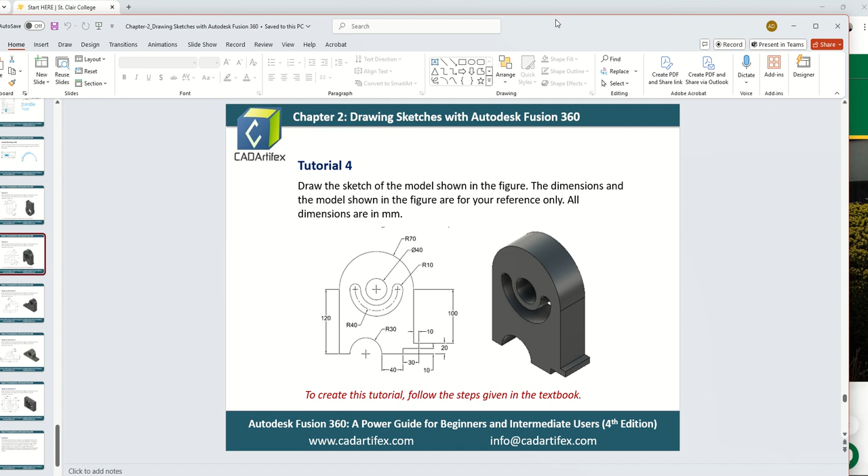Open up Fusion, I'll bring in my diagram here. Let's draw this one again from the front plane, and we're going to create a sketch. And let's start this one by...

drawing a rectangle. Let's draw a 120 by, this radius up here is 70, that diameter is 140. So let's draw a 120 by 140 rectangle.

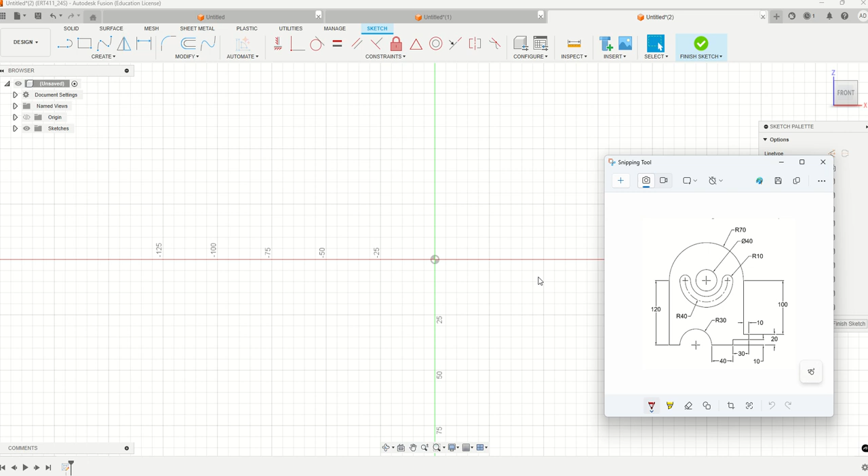Starting here, and we'll go 140 by 120. And that's going to be the basis of everything we're going to do.

And let's add to this now. So let's add a circle to the top of this, or I guess we can do it as a line, however we want to do it.

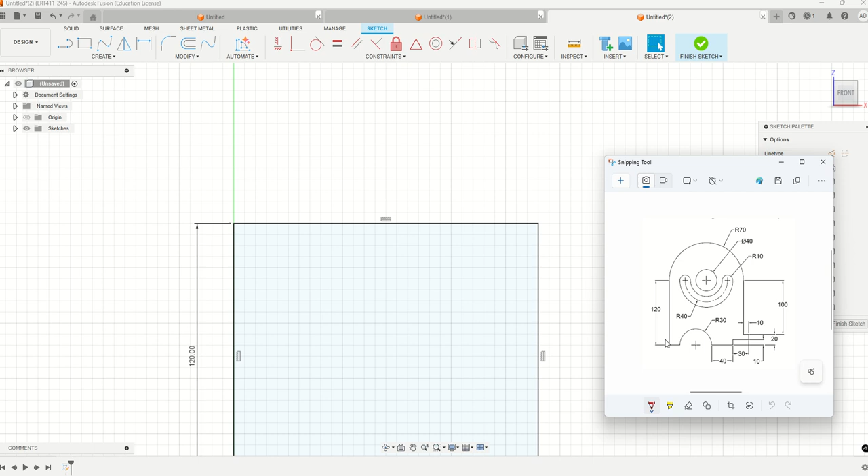But let's create it as a 3-point arc. Let's try it.

So here, here, and what's our midpoint here? Right there, and up. I think that's our 70 point there.

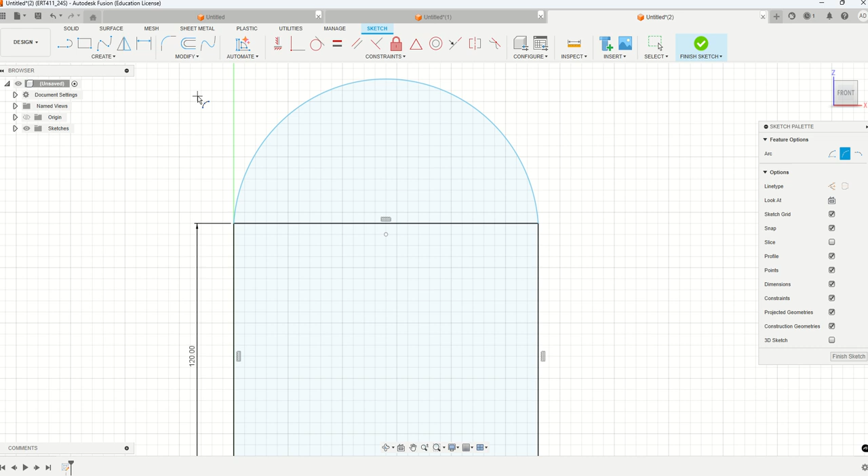Does that seem right? Not sure if that's right or not. No, that's not right. So let's go 70. All right, that's our radius of 70 there.

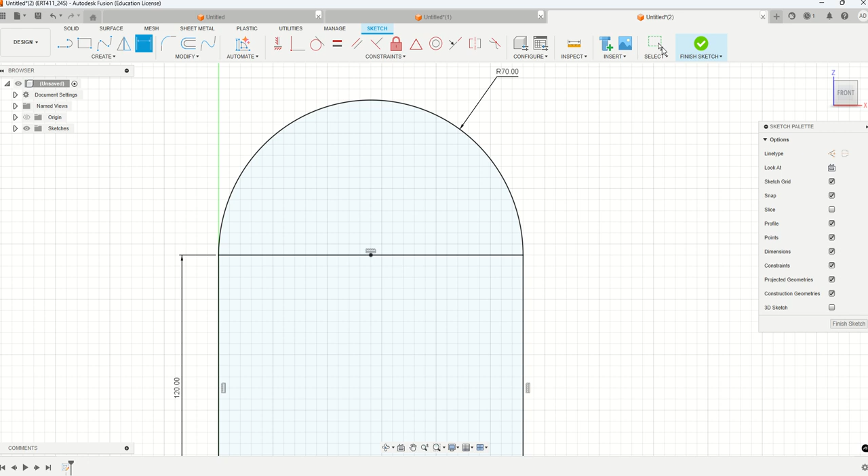Okay, so that's our arc. That's going to be on the top. And then we can just delete this line here afterwards. So that's that.

Now at this center point here, that locates that center point for us. Let's put a circle right there. Diameter of this has a diameter of 40.

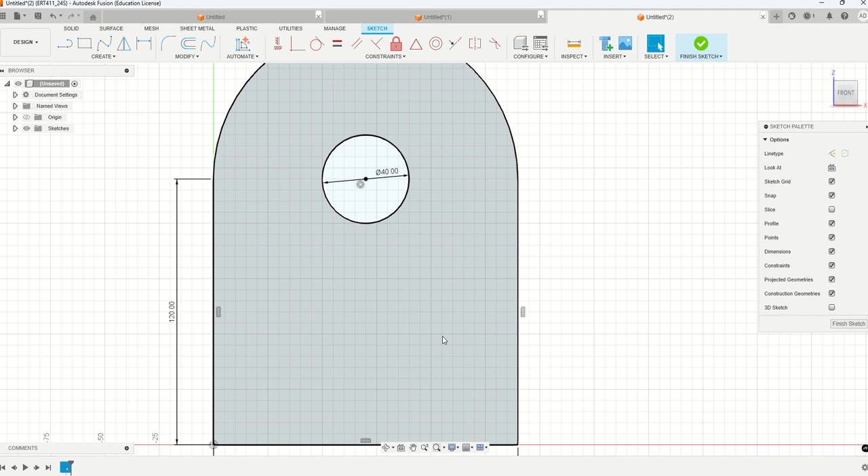Down here we have a couple things. We've got a little notch that sticks out. I guess first of all, we come in 30 and up 10. There's that little notch, and then there's another little piece that sticks out.

I actually do this wrong here. I think that only comes down that far.

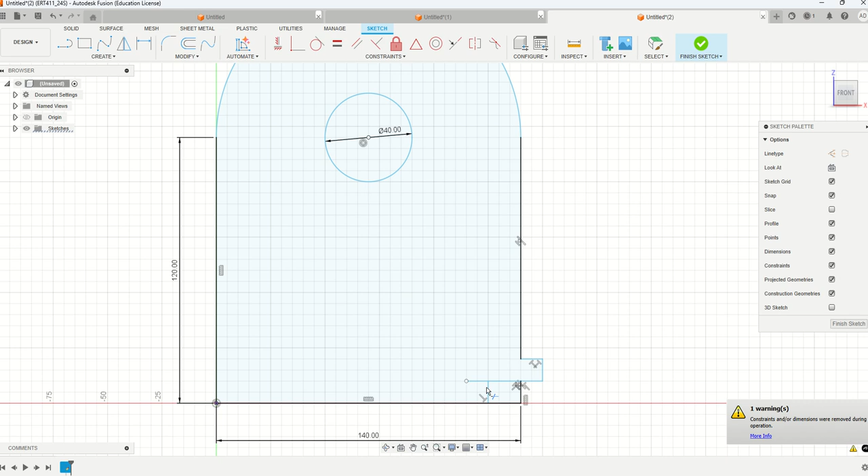Delete that. And I'm going to trim this. Trim this little section here, and this piece here, and this piece here, and this piece here. I think that's all correct.

I'm just going to dimension this just to make sure. So that's supposed to be a dimension of 10. That's good. Here to here is supposed to be 30. So that's incorrect. That's supposed to be 30.

And this from here to here is also 10. That's good. So I think I've got all that correct.

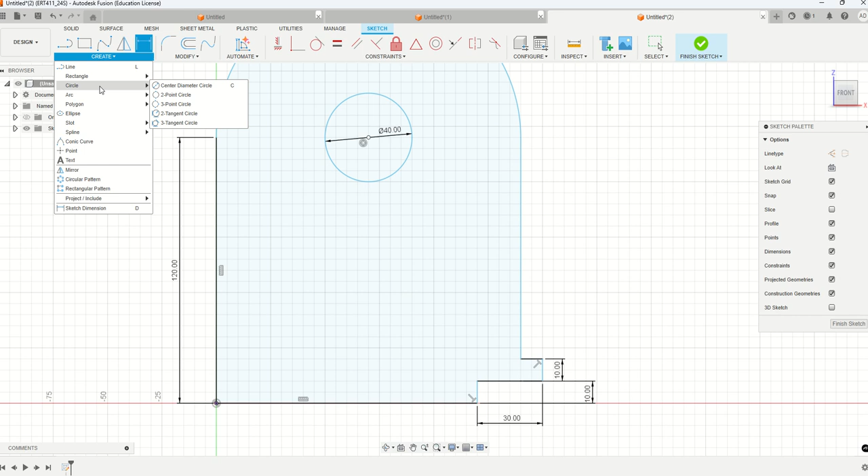And now what we want to do is have a circle. So how do we locate where this circle goes? It has a radius of 30, and it's going to be 40 from here.

So what I can do is I can just draw another rectangle here. I'm just going to come over 40 and up some number. I'm just going to say 20 because I'm just going to delete this later.

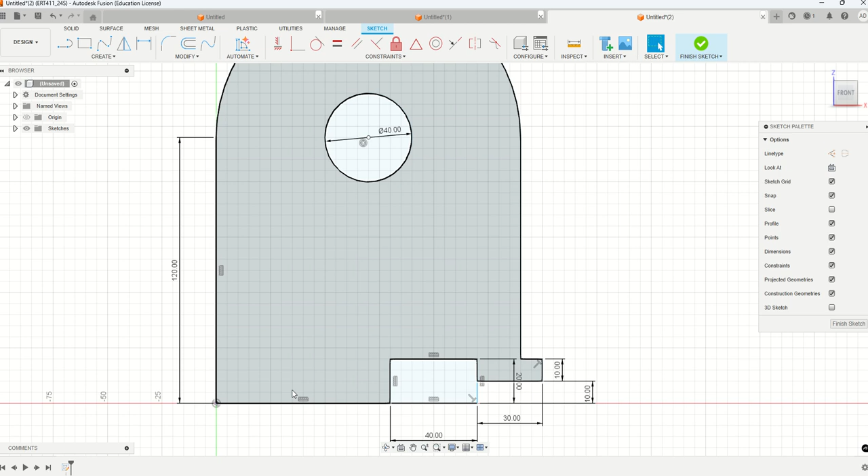To create a 2-point circle starting here and going this way with the diameter of 60 because it's a radius of 30.

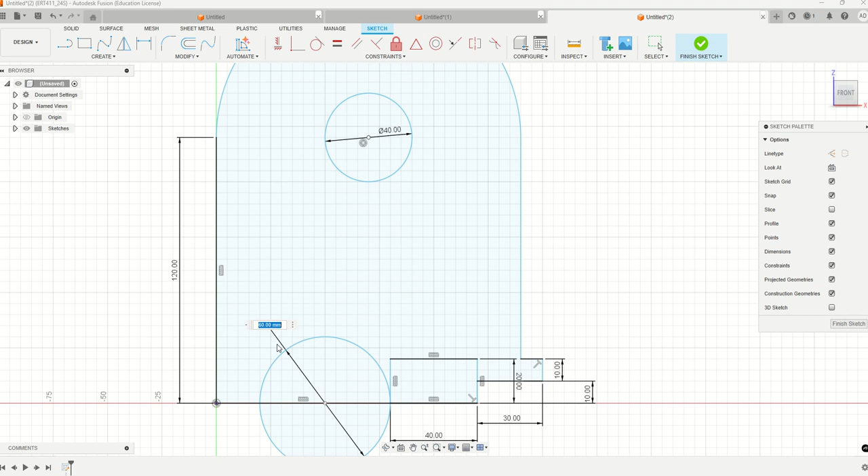You can see I can change these dimensions. That shows diameter right now, but I'm going to select this, do a right click here and say toggle to radius. That now shows that as a radius.

So now I've got some extra junk in here that I don't need. So I'm going to delete this line, and then cut or trim this line, and...

Actually back up. Start by trimming this part of the circle, and then that part there, and that's my cutout at the bottom. That's all good.

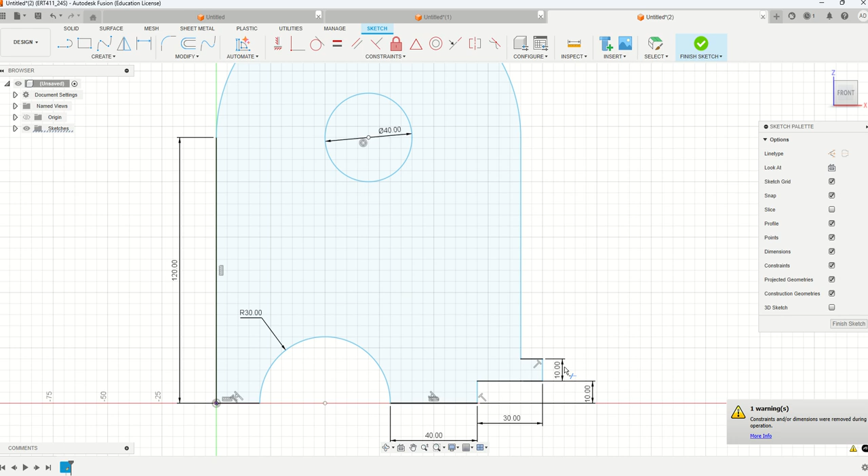And now what I want to do is get the slot. Now this is actually really easy. It's a slot tool, and we want to do...

a center point arc slot. There's lots of different ways you can do this, but this is actually really easy.

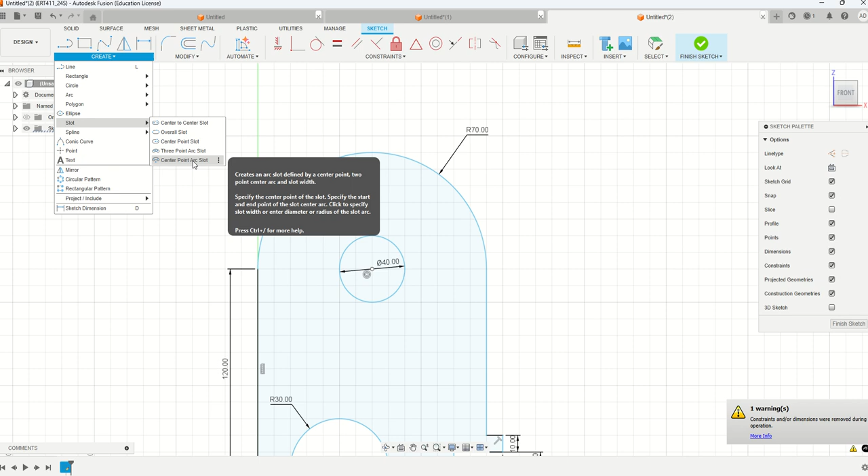So we're going to say this is my center point of my arc. My radius is 40, which is right here. I'm going to pick my starting point. I'm going to draw the arc.

My ending point is right here. I'm going to say how wide is it. It has a...

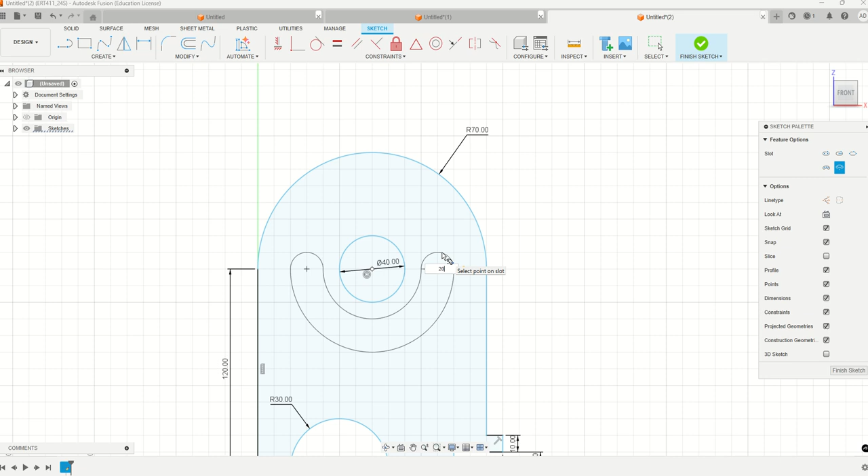There we go. Yeah, so that's the diameter of 20, or a radius of, if I toggle this, toggle that to a radius, I'll move that out here.

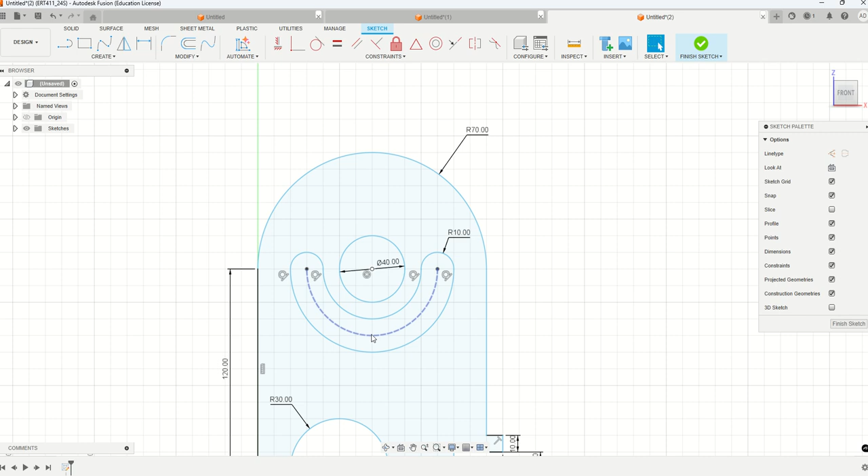So that is drawing an arc. There's lots of ways you can draw arcs, but the tool does it really nicely for you, and you'll see this is now, that recognizes that as that shape.

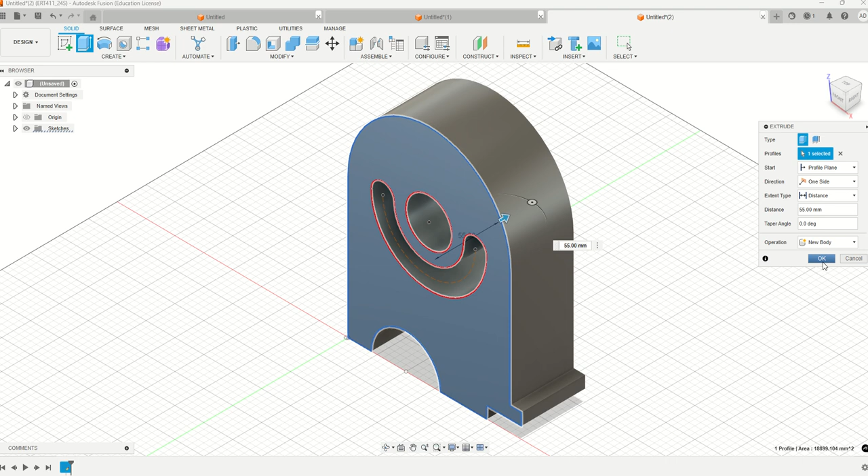And we finish the sketch. We get this. That's that, and we can extrude that whatever depth we want to extrude it to, but that is our shape.